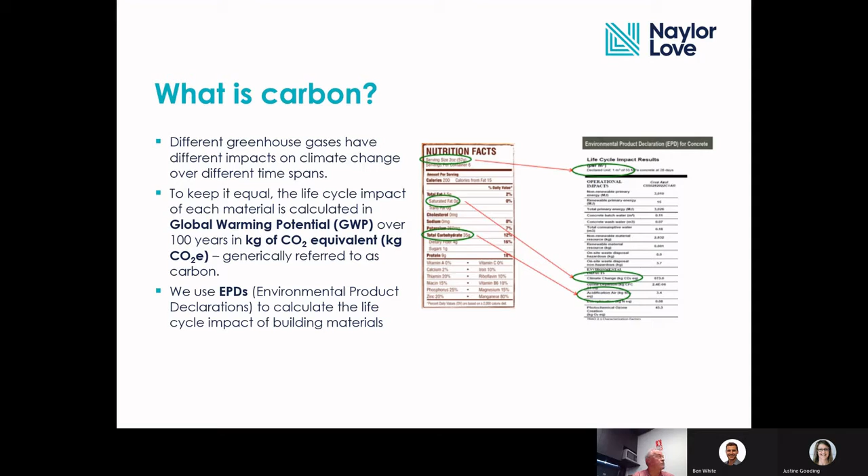The whole carbon cycle, pretty obvious. We know trees absorb CO2. Trees are a bit like humans. When they're young, they don't suck up much. As they get through puberty, they use a lot. And as they get towards the end of their life, like Grant and myself, they sort of slow down a bit. So ideally, what you want to be doing is using that timber and replanting to keep it going. So if we're going to cut down the Amazon forest to build timber buildings, it's not really going to work. But if we're going to plant another tree for the one that we cut down and utilize, it's a pretty good system.

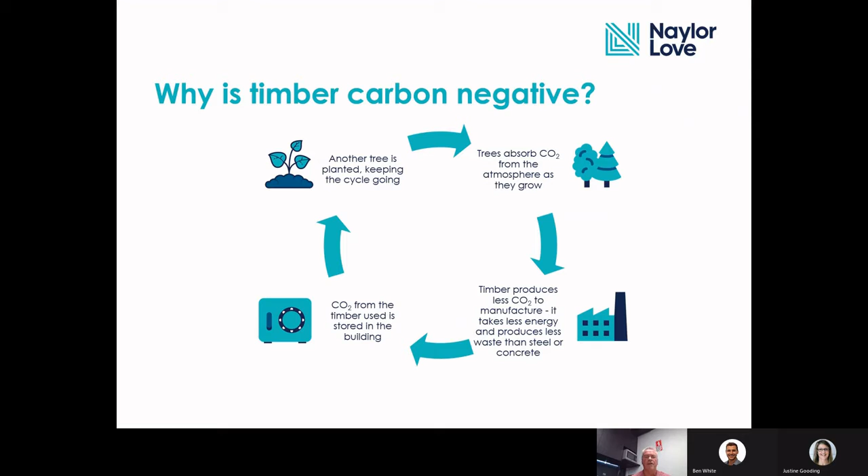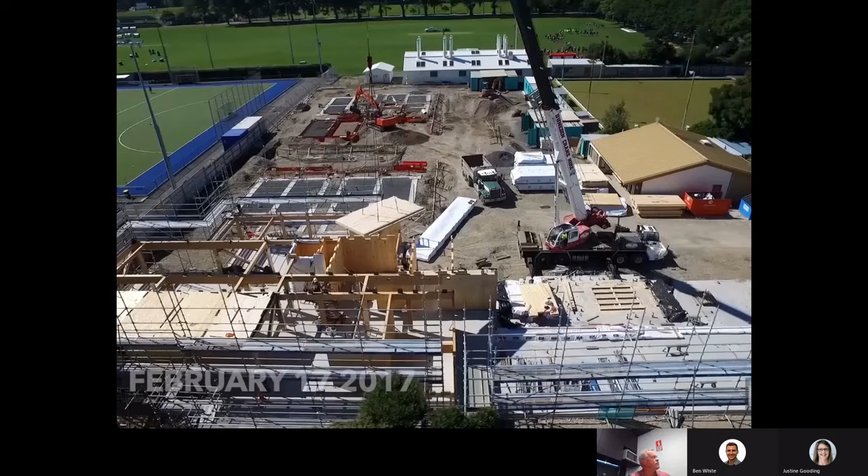Some unabashed advertising for Naylor Love. This is a building we built, you can see 2017, so a few years ago. This was CLT in those days, manufactured by XLAM in Nelson, and the LVL structural components in the lower floor from Nelson Pine. This may or may not work on Teams. We'll just see how we go.

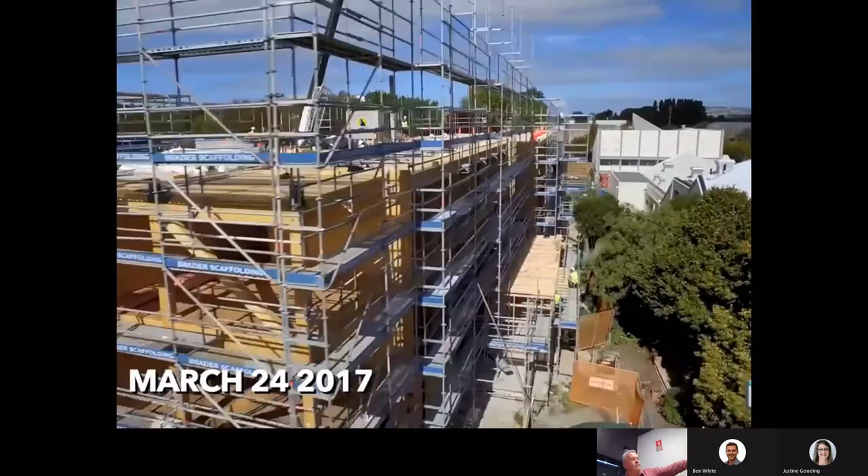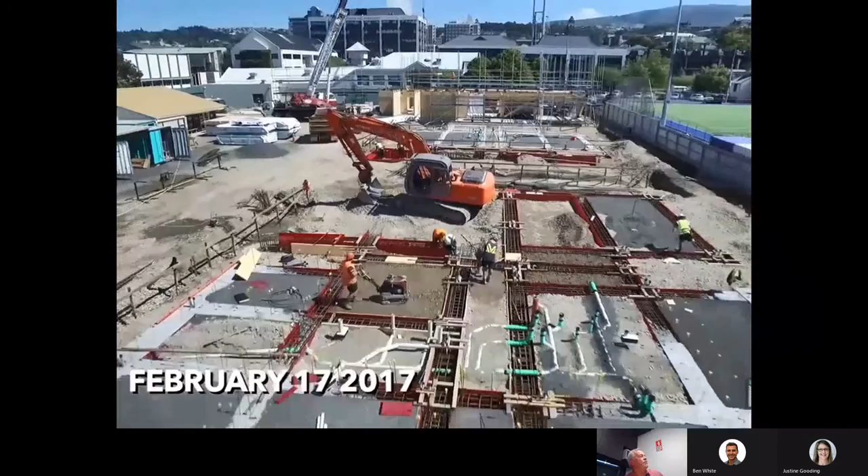So this is a student village at Otago Polytechnic. February 17th, we got components. March 24, which is 5 weeks later, we had a 5-story building standing. So the time to erect your timber components is really fast. You have to have everything complete and ready to go for that to make that impact. The time to sling an LVL column versus a steel column is arguably similar. And the fact is people like working with lighter materials, so it's perhaps a little bit quicker.

But the main difference is in the floor system. So in this particular building, CLT panels are going in as the floors. When that CLT panel is installed, you can work above and below it straight away. There was no propping, there were no other bracing elements. It was sort of 99% waterproof when it went in. So the speed of erection was really dictated by that floor system.

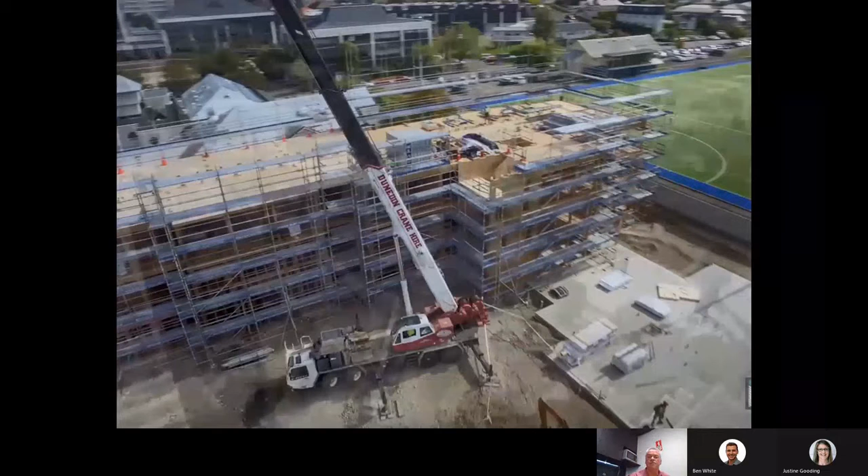On this particular building, the bulk of the CLT was untreated. If it's coming from Europe, we call it naturally resistant because it sounds better. I have a personal like for the larches and spruces and those sorts of materials. This was actually New Zealand pine, but it was still untreated because a lot of it was left exposed, and a lot of our clients don't particularly want that chemical treatment in all of their CLT or LVL.

The reason it was consented quite easily is you can see the perimeter of the building is missing. So pretty much all those elements are inside the building, apart from the wet areas. The wet areas in that building would be CLT treated to H3.2. The rest of it was untreated. The exterior of the building was a totally separate system, almost independent of the CLT structure, but obviously held by the structure, which allowed you to have flexibility with what you built inside and outside the building.

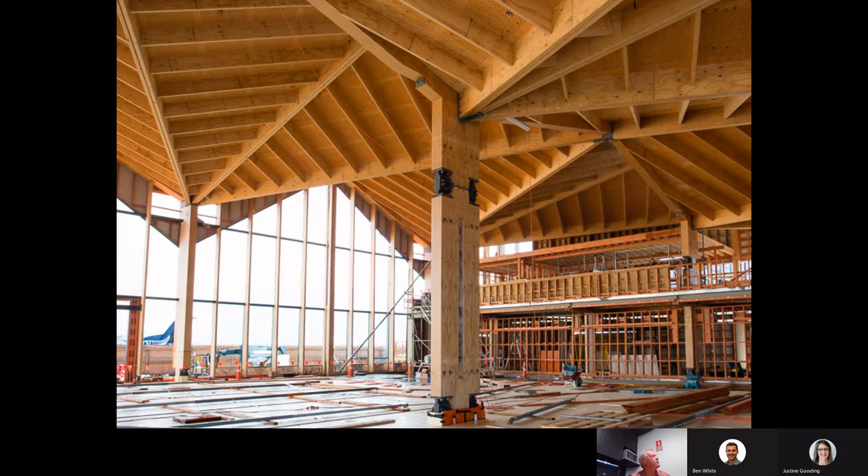Some other timber buildings: Nelson Airport, probably the most complex timber building we have done.

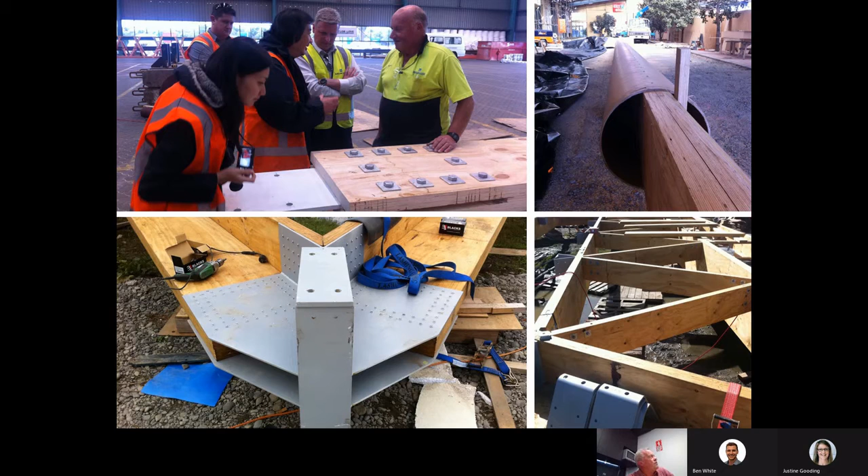A lot of the cost in these timber buildings is in the joints and detailing. So you can see the apex of that particular frame. Massive piece of steel, lots of fixings, all bespoke built. And one of the things we have to do, I suppose, as an industry is try to simplify these details. Not that you're going to build a lot of cathedrals. I think in that top right, you can see, each cardboard tube in that cathedral has actually got a great big LVL beam inside it.

As it turns out, it was one of the first hybrid structures that we'd built, although we didn't realize it at the time. So as we go through this presentation, we'll refer back to hybrid structures. So we basically have, if you think of the cardboard tubes as actually LVL, we have steel bracing elements taking seismic loads, and we have the gravity loads taken by timber, which is a recurring theme as we go through the buildings we've built.

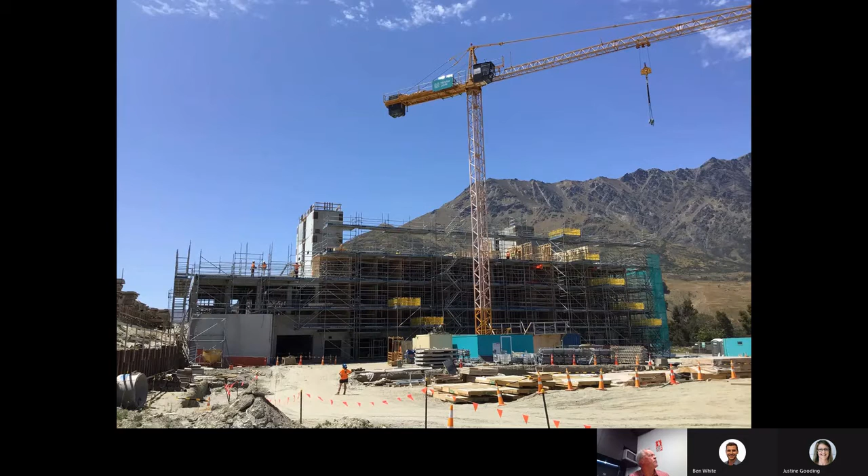This is another hybrid building we built in Queenstown. So it has a precast concrete, effectively a rocking shear core, and the rest of the building is built in timber. Now, this isn't a CLT building, it's stick framing. So the stick framing is supporting the concrete floor, a composite floor. I think every second frame has a timber joist, plywood deck, and then a concrete topping poured on top of it.

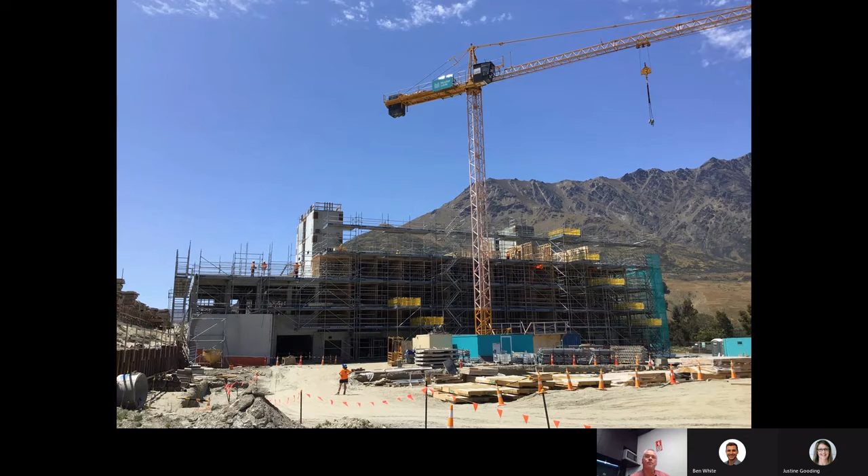So you wouldn't want to go around removing partitions later, but quite an interesting way to approach that build. Again, from the outside, this one chose not to express the timber. You wouldn't particularly know if it was a timber or a concrete build.

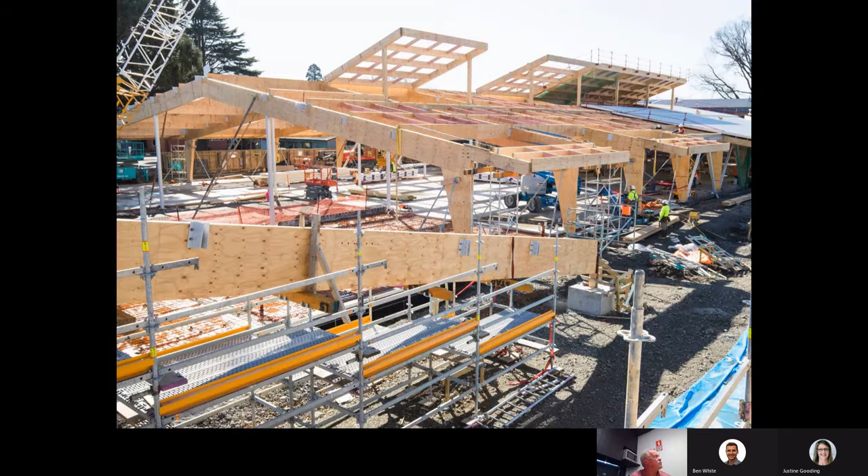Going quickly, I think it's Rangiora High School by the looks of it, and some industrial buildings as well. The industrial build wasn't to save the planet, it was because steel rusts, and both Ravensdown and Balance continue to build fertilizer sheds with steel purlins and steel cladding, and they all rust. This one has obviously LVL portals, I think glulam purlins, and plastic cladding.

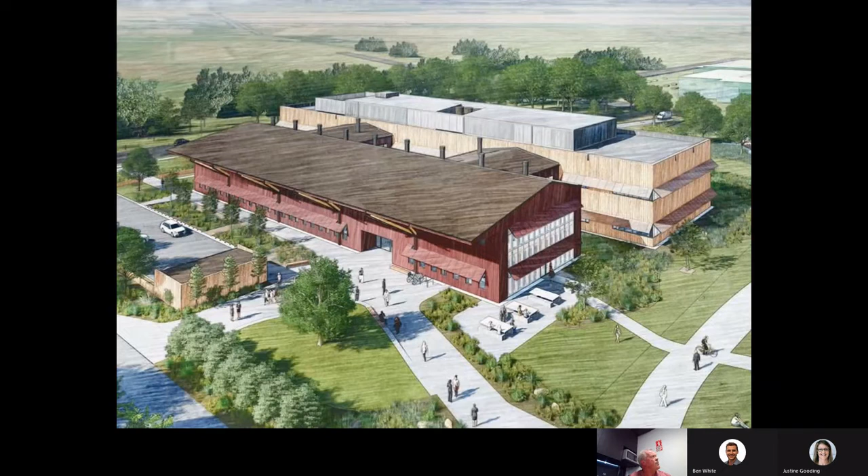Stuff coming up, just because it's sort of interesting in terms of the local area. AgResearch out at Lincoln, 2 buildings, one at the back's a concrete laboratory, one at the front is an admin building built in timber. Sort of demonstrates that timber is not great for everything. So the lab has to have minimal vibration and minimal deflection. It's going to be built in concrete. The office building a bit more flexible.

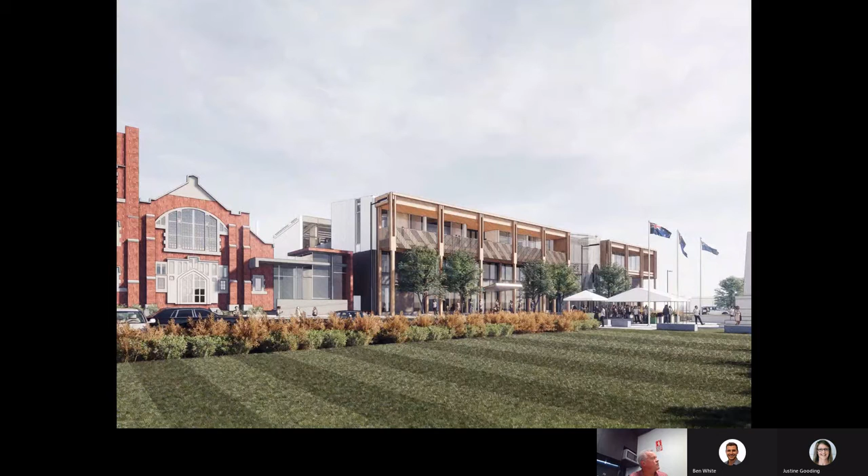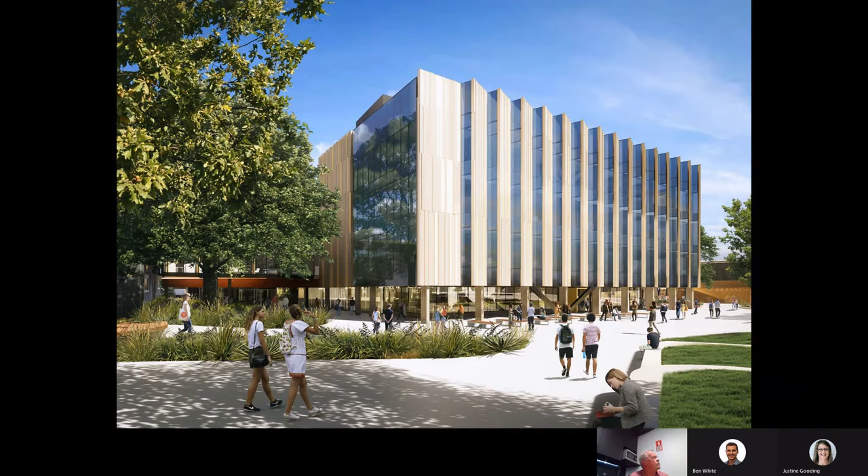Ashburton Library, just started that down south. That's predominantly CLT. In fact, it's all timber. There is no concrete or steel seismic resisting elements in that. Otago Polytechnic, again, all timber. It's started, it's a trade centre, and AUT A1 in Auckland is due to start later this year as well. So there's a bit more interest in these big timber buildings. Most of them are actually coming from government or pseudo-government departments.

What carbon savings can we achieve? So what we did is we designed a classic 6-level concrete and steel building in Christchurch. It was originally designed as a steel frame with steel K-braces and a Comflor type floor or a concrete composite floor. Okay, in this building, we assumed a level site. We kept the foundations the same, knowing that the timber structure will be slightly lighter, but for the sake of the exercise, we kept it the same. And we used the best possible EPD data everywhere.

So what we did is we kept the steel K-braces. You can see those in red. And the red straps going across the CLT floor are effectively drag bars to take the loads back into those K-braces. So it would be nice to do it in timber, and you clever people can do it all in timber. I suppose we thought from an economic point of view, it is going to be better to have $1 each way. Just explaining in terms of the elements that are concrete and steel.

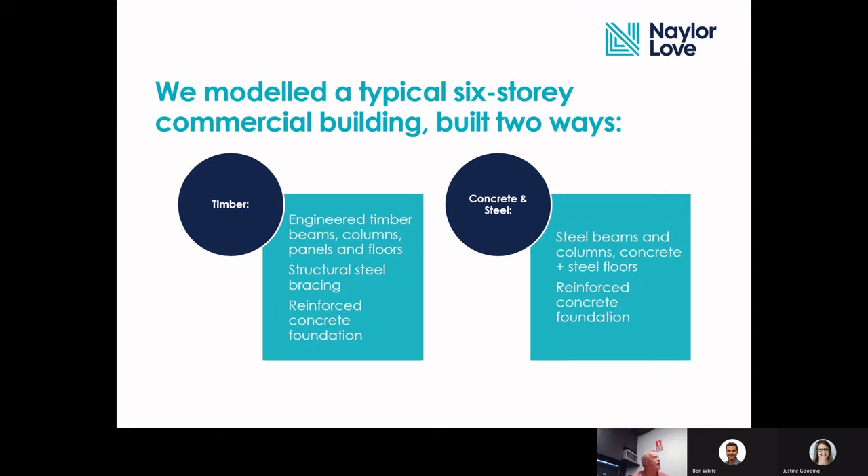We then decided to measure all these things. So we developed a carbon calculator type system with ThinkStep, which is basically a series of spreadsheets. And summarizing it down, what we're basically doing is taking your structural elements, measuring them in the appropriate form, whether it's cubic meters of concrete or kilograms of steel, depending on how the EPD data is presented.

So at this point, we had on the right-hand side our concrete and steel building, and then on the left, what we thought was a timber building. But you can see it's still got shitloads of concrete and steel. So we were a bit despondent, and we thought, well, the carbon saving is going to be minimal, probably wasted our time.

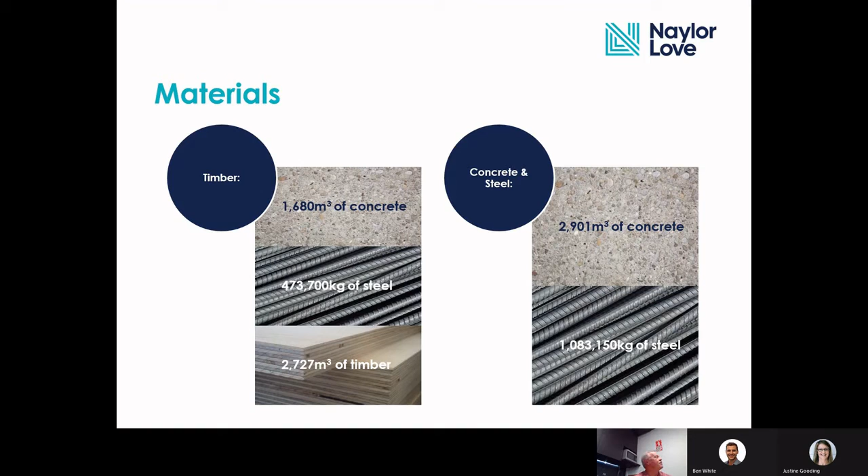In the event, the carbon saving was 90% on the structure. So quite staggering, the difference, given the amount of concrete and steel still in the equation. Now, how that basically works, as you all know, is we have this credit created by the timber structure below the line, and then we have the concrete and steel taking us back above the line. And effectively where those two points on the line stop is where we ended up.

So you can see from that building, it would be very easy to make the structure carbon neutral. You wouldn't have to do much to the design. In fact, if we realistically lightened the concrete foundation to what it should be, I'm pretty sure we'd get that building back to zero. So that sounds great, but to me, being a builder, it doesn't mean a hell of a lot. So we had to convert it into something I can understand.

So we saved 3,861 tonnes of CO2 equivalent, and that is the same as 2.5 million kilos of coal being burnt. So it's quite a staggering amount. Like, there is not a lot else you could do on this planet to save that sort of CO2 equivalent numbers. And it's great to drive your electric car and all those sorts of things, but it's a phenomenal amount.

As an example, Naylor Love Construction is a $650 million per year company. That's how much building we do every year. We have 8 branches, and our carbon footprint, actually you might have a slide. Effectively, it's equivalent to 2 times our carbon footprint from the entire year as that one building.

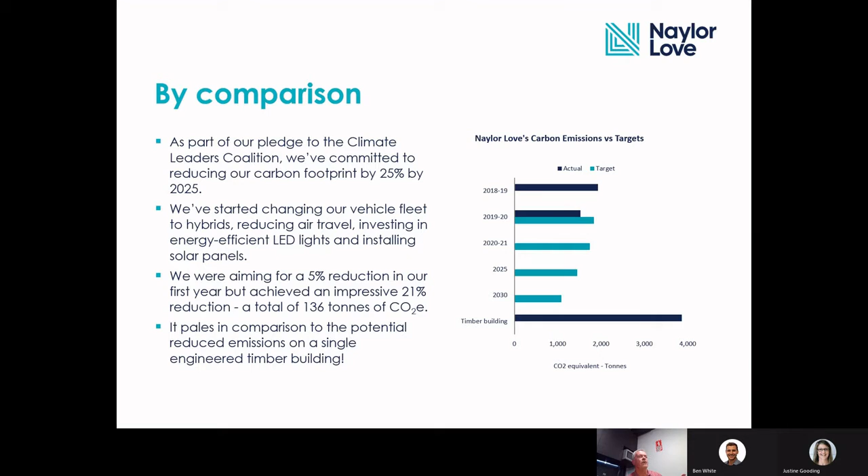In terms of cost, are there any QSs in the room? I'll speak slowly, it's okay.

In terms of cost, at this stage, we used European spruce for the exercise because, quite frankly, at that point in time, the New Zealand product was just too expensive. It's getting closer now with COVID and shipping and other industry pressures. But anyway, for this exercise we used European spruce, but as mentioned earlier, we measured the carbon to get it on a truck from the factory to the port, on a boat from the port to New Zealand. So the cost of that structure was about 10% dearer.

Now, all of that 10% was in the floor system. On a concrete floor, we have acoustic and fire given. In a timber floor, we have to use layers. So the additional cost on the structure wasn't in the structural elements. It was basically adding what we could call a computer floor or a floating floor on top of the CLT. I mean, you could bullshit and hide that in the fit out, for instance, but in reality, for it to perform the same as a concrete floor, we had to add this composite floor.

The good thing about it, it creates a great cavity for services, and it is relatively cheap. It can be a complicated computer cradle system, or like we've often done, I think we just did one at Redwood School, it can be a 3x2 on edge on a little rubber pad with stable flooring. So it doesn't have to be complicated, it can be relatively cheap. And that was giving us acoustic separation and an area to run services as well.

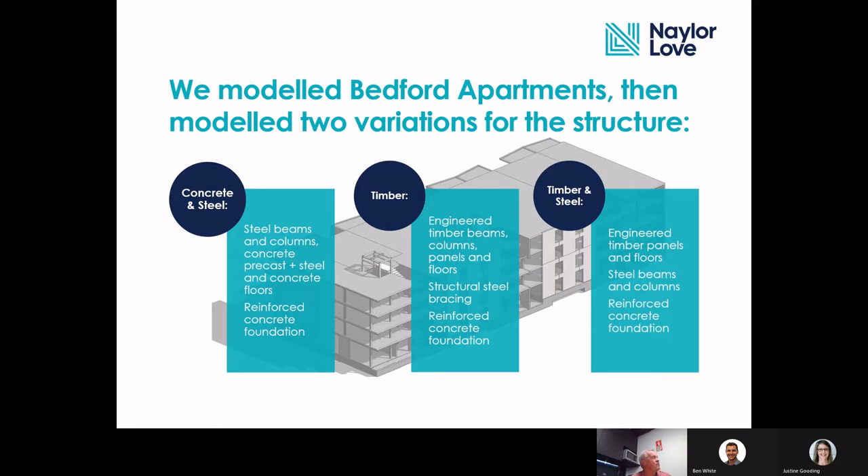So we designed it another 2 ways. We did it totally in timber: engineered timber beams, columns, panels, floors, structural steel bracing. And then the second one was more of a hybrid, so we had steel beams and columns included. We then started measuring all our materials, just a summary of how it goes, and we can see the 3 different versions there.

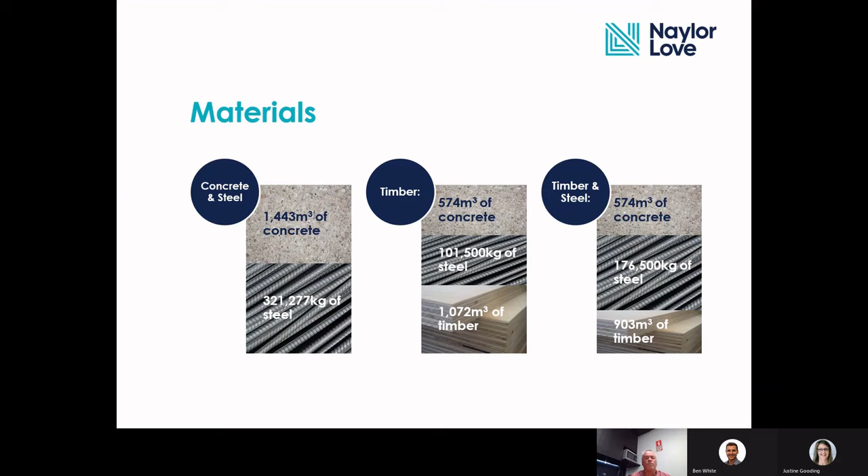Again, still quite a lot of concrete and steel, predominantly from the foundation requirement. We then measured the carbon, and there's the difference. So even in the hybrid structure, you're still looking at sort of a 90% saving in the carbon in your structure.

And I won't show any other examples, but basically between the two on the right-hand side, we have a nominal saving in carbon but a massive increase in cost. Okay, so if you want to take all your seismic loads in a relatively tall building through your timber structure, you can certainly do it. And we've got some examples of ones we're doing at the moment, and it's great fun and it's really good to build that way. But our experience is that that's a significant cost premium.

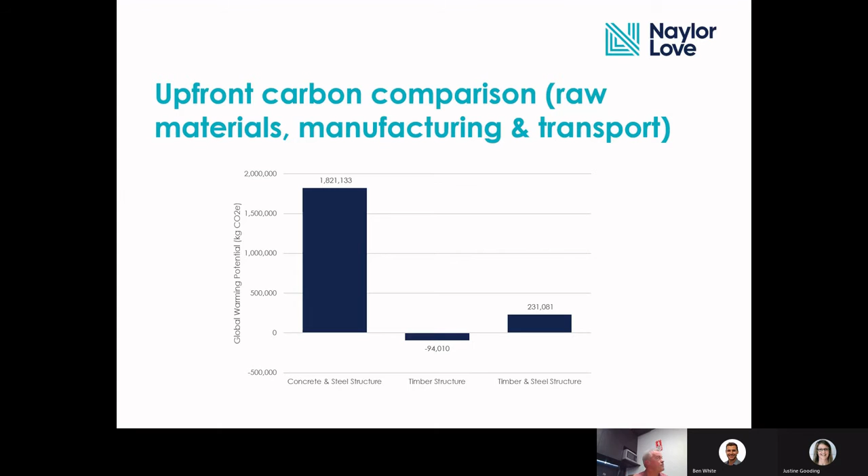So we're doing some buildings at the moment with sort of 300 thick CLT walls with Macalloy bars and dampeners, and they're cool to build, but they're very expensive. In summary, with that exercise, a building like that office building is about a third of the total cost of the build. Okay, so ultimately it's going to be a 3% premium if you design it appropriately.

That's what we believe. If you listen to some of the timber suppliers, the Red Stags and that, they'll say, look, we can build it for the same price or cheaper. I don't think you can. I actually think from our experience pricing these projects and building some of them, it's going to be a premium, but it's going to be quite small. If you can design it appropriately and you can save that amount of carbon for maybe a 2 to 3% premium, it's still very saleable. You know, I don't think it's ever going to be super cheap, but it doesn't have to be expensive.

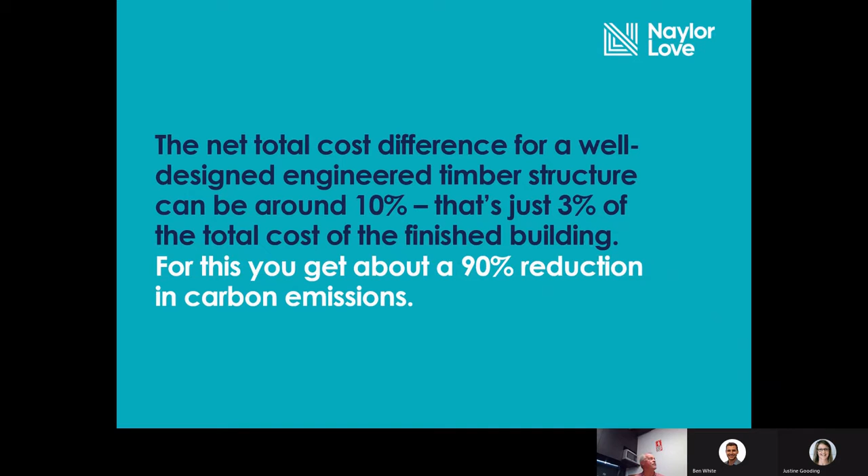If you're designing a big span open office building, don't do it in timber. It isn't fit for every purpose. You know, the elements are bigger, it sags more. But if you can control that and you're happy about using hybrid structures, it's certainly got great opportunity. In terms of lessons that we've learnt on the way through, hybrid buildings deliver impressive carbon savings at a comparable cost. So that was a big one.

So no matter how we measured it, and this gets right back to, at the moment, we're working on a design for a simple warehouse, you know, the red shed. So big portal frames, and we're doing one in timber. So we have LVL portals and we have LVL purlins, I think. And the engineer designed these great big timber columns in the middle to hold it up. And it was expensive, and from a retail point of view, quite ugly.

So take your big timber column in the middle and change it to 125 RHS and paint it white, and it disappears. And it's really cheap and it's really light, and it changes your carbon values bugger all, but it makes the commercial reality of the building work. So if we'd stuck to it's all got to be 100% timber, the client wouldn't build it. It was just too expensive. So if we want to get more timber involved in the industry, we have to, I think, this is a personal view, we have to be more flexible with some of those details.

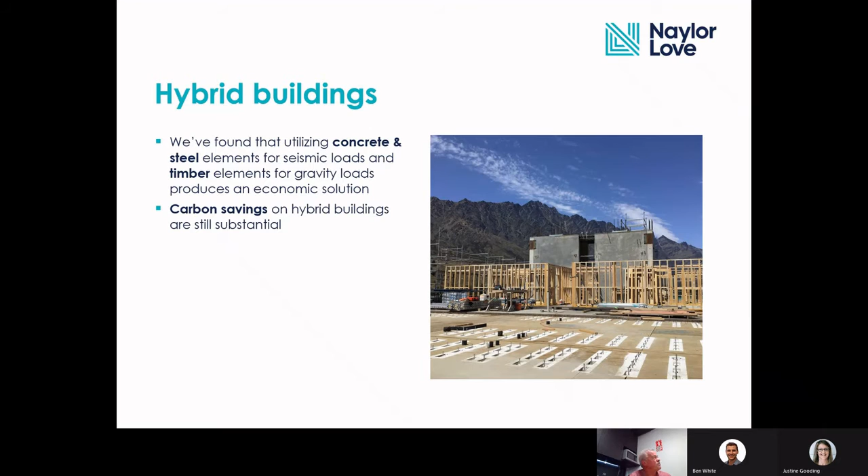Utilising concrete and steel, so that's another hybrid structure we did there. We've sort of pretty much covered that on the yarn on the way through. Cost comparison, so we actually measured one. So we're doing a timber job at the moment, and it's got, you know, the big shear walls in timber and dampeners and all sorts of things. And the cost of that shear wall is $1,400 a square metre. If we designed it in situ concrete, it would be half of that. And that's taking into account that we're going to have to make it a bit heavier because we haven't got that ductility. We're going to more elastic design.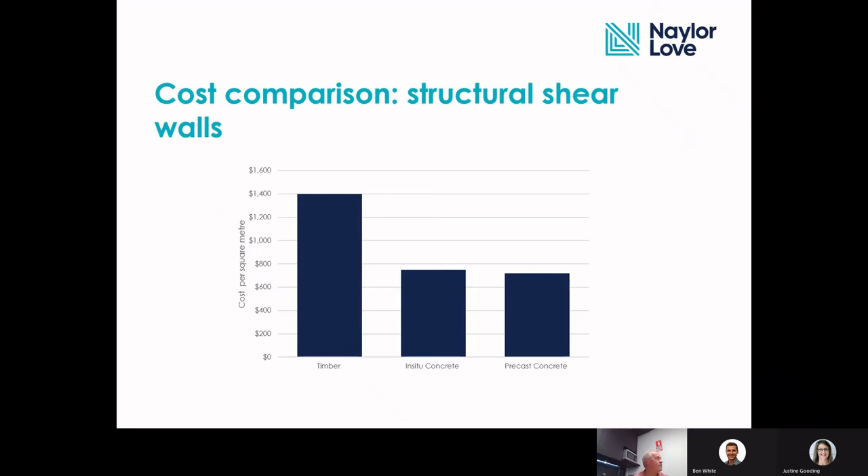But if we design it in precast concrete, it would be similar as well. So that's the magnitude of difference in the seismic elements. It's sort of double on the exercise we've done. So certainly don't want to discourage you from coming up with really cool seismic timber designs. But if cost is a factor for your client, you need to consider other more sort of regular designs.

The other thing we come across is also designing for the material. So standard New Zealand LVL comes 1,200 millimetres wide and 12 metres long. It can be spliced to longer lengths, but it can be expensive and a little bit ugly.

If you're trying to think about a simple example, say you have an LVL portal frame and you cut it into this really cool triangle, you're going to throw away the other piece of LVL, but you're also going to pay for it before you throw it away. Again, we come across this: we'll price the job for an architect and they say, oh, but the LVL supplier told us it was $2,000 a cubic meter and it's working out at $3,000. And we have to point out, well, you realize it comes like this and you've just cut a whole lot out, and that's gone to the chipper and is now used for fuel by Nelson Pine or Carter Holt Harvey. So it's important when designing it that you recognize the limitations of the material.

So LVL, 1,200 wide, 12 meters long. If you want it any longer, it gets expensive. It comes off the production line, goes somewhere else, gets detailed and spliced and comes back. If you have a funny shape, say an 800 rafter, you've got a 400 column there you can use. If you cut funny shapes into it, just be prepared to pay for it. Glulam can be made to any shape, form and length, but is generally more expensive.

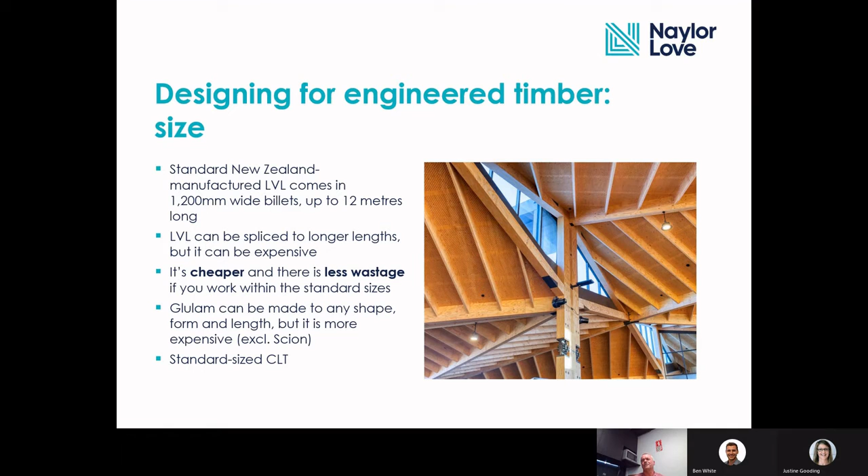So really roughly, you'll know more, but I was talking to Alistair Cattanach from Dunning Thornton, who we do a bit of work with, the other day, and he said he wants a 200 thick panel, and others will say we need 145, and I'm thinking 145 plus a bit of charring, maybe 165 in that sort of order. But you're spanning that 4 meters approximately. Let me know.

Some examples. At the Tauranga Airport that we built, the architect chose to make the portals look like that, which is quite stunning, but we did them in glulam because they're a funny shape.

Redwood School, you could say it's butt ugly, but it's a standard shape, and it's regular, and we did them in LVL, albeit we did splice them to get them to go the length. But they're two really simple examples in terms of horses for courses. That's perfect for its use. You'd be wasting your money doing that in glulam, but you'd be killing yourself trying to do that in LVL. So just remember the materials that you're specifying, working in.

Really, really roughly, a standard LVL structure, you'll get the base material for about $2,000 a cubic meter. For a glulam structure, it's going to be closer to 3,000. But it's very easy to get them mismatched and carried away in terms of sizes and quantities and wastage. What's CLT? CLT, I'll be careful of this one. Probably, look, to be fair, 1,800 a cubic meter. That needs to be about 13 or 14 to be comparable to concrete and steel.

Yeah. Pre-COVID, we could import spruce for about 30% less than we could buy it from Rotorua. I think that's probably changed a little bit now. It's probably getting a little bit balanced. And when production gets ramped up with CLT, it should come down. And when you guys tell me the size that you will specify, it'll come way down. You'll be building your houses out of it.

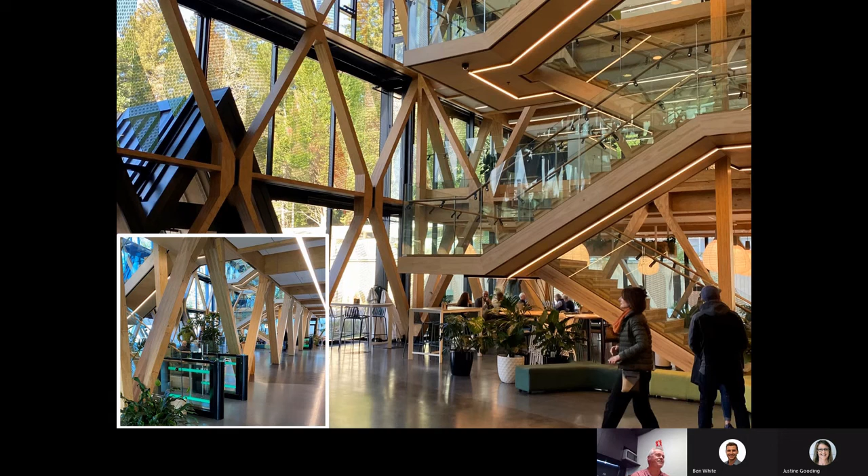So if it's a CLT floor and it gets wet, it's often as simple as squeegeeing all the water off every day. It's not rocket science, but if you leave it there, it'll get moldy. So it doesn't have to be complicated, we just need to consider it.

Treatment's another part of the material design. So LVL, really easy to treat to 1.2, so that's great internally. You can treat it to 3.2, but again, you're taking a material and you're adding quite a lot of expense to get it up to 3.2. My advice was, if you're in the 3.2 region, go to glulam. If you have a rafter that's going from inside a building to outside a building, and it's an LVL, you're probably going to have to protect it. If it's in glulam, you can leave it exposed. And these aren't necessarily engineering decisions, they might be architectural, but it's just being aware of those factors when you're selecting those materials.

The spruces and larches that all come from Europe, we like to call them naturally resistant as opposed to untreated, because the council hates that word, untreated. And look, the fact is the rest of the planet's been building out of those materials forever, so we shouldn't be scared of them. We just need to detail appropriately.

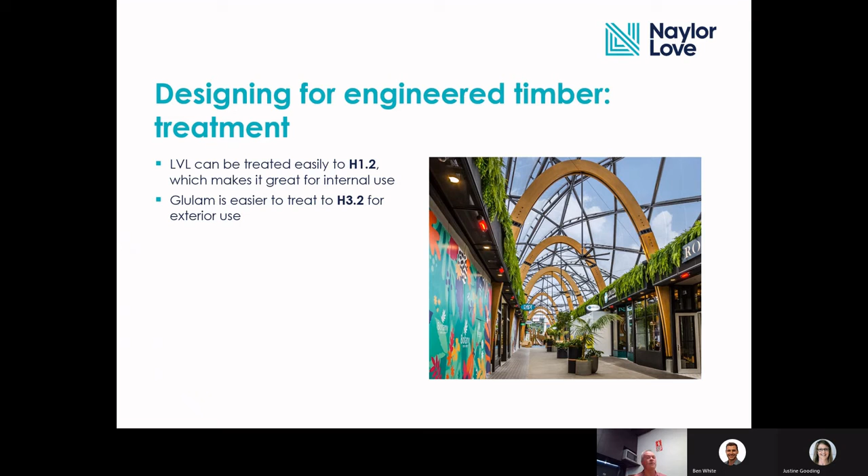Without sort of taking the piss totally out of concrete and steel, the concrete industry is doing its bit. Currently, we can use concrete with up to 30% of fly ash replacing the cement. So you're effectively taking 30% of your CO2 equivalents out of your concrete. I think next year there's some material coming off the east coast of Australia, and we might get it up to sort of 55. So that's good.

There's a note there about N-class reinforcing. It doesn't really apply to New Zealand because of our seismic code, but in other countries it doesn't have to be E-class. And we have now got one steel mill that's trialled producing structural steel from a hydrogen-based fuel. So you'll see there's lots of articles from concrete and steel saying, hey, steel's really good. And this isn't an anti-steel or concrete exercise, but the fact is that they all have to do their bit.

This won't go down terribly well with your clients. Press pause. So pretty much, if you're silly enough to tender a job and not negotiate it, well, then it's your own fault. But basically,

with timber, you have to complete your detailed design in conjunction with your supplier of your materials. You have to complete your shop drawings to 100%, and you have to have your production slot booked. If you don't have your production slot booked, your project won't be built. And when I say it won't be built, it doesn't matter how many men you put on site, you won't have your timber, and it won't arrive till the next production slot's available. And it's going to get more intense as timber goes up.

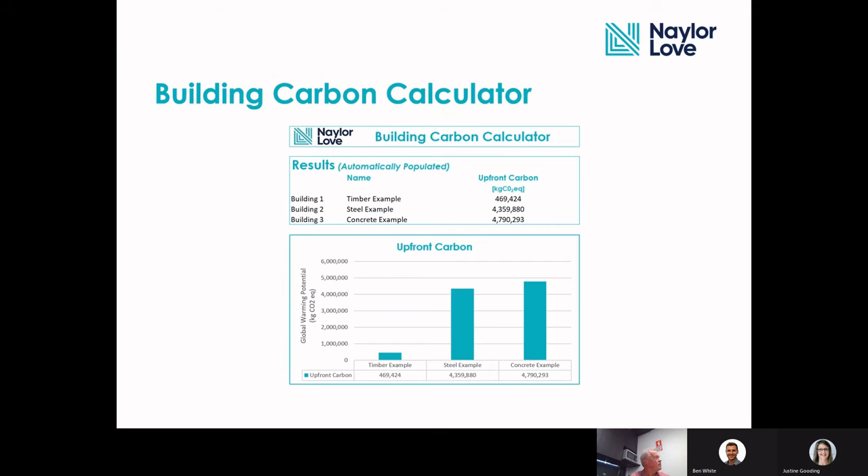With a bit of luck, I'll be able to open the carbon calculator and I'll show you. There's a couple of slides here. Any questions, which we can deal with in a minute? And we get asked this question all the time. Who would we recommend as timber engineers? And we say at the moment, there's only two. These blokes here. No, look, it is becoming more and more important through the whole client base.

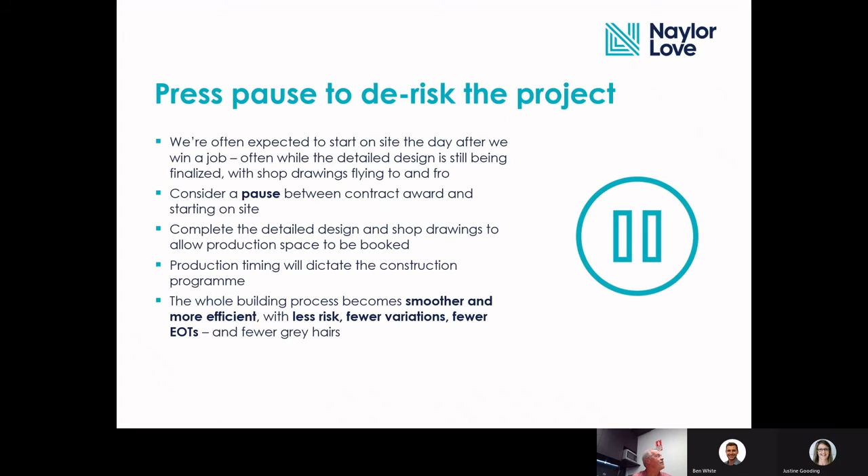Everyone's saying to us, how do we build it in timber? Who do we contact? So I think the Timber Design Society is a good sort of conduit to pass that information through. Everybody wants to learn about it. It is really easy to build an expensive building. And the worst thing we can do is to produce expensive designs, because it's going to hamper the progress of getting timber into it. So before I go into the calculator, is there anything else you would like to know or query or challenge? Come on, there's got to be something there.

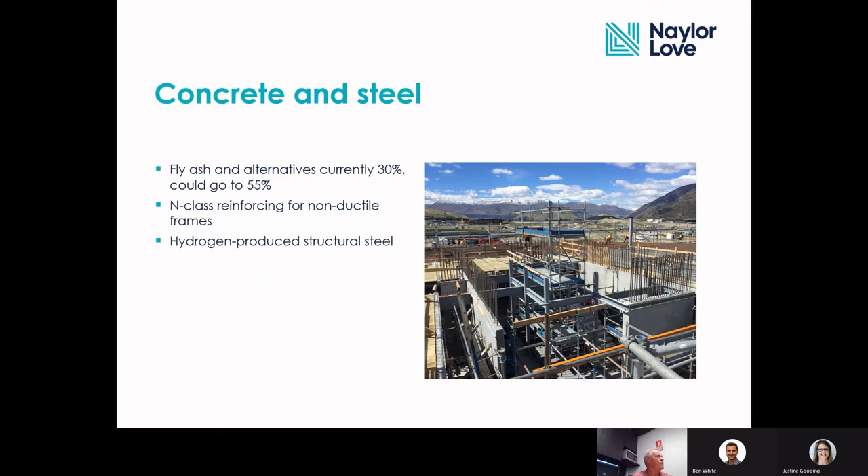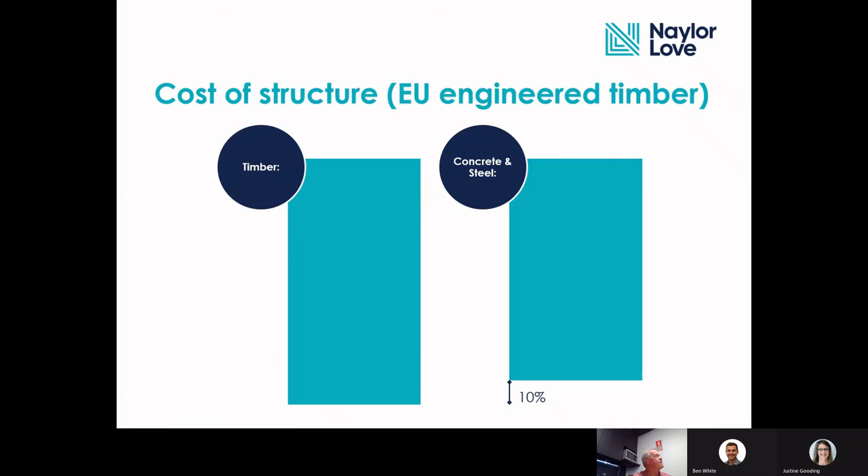I'm wondering, when you did the cost comparison, did you only consider material? Or did you consider also the savings on time in terms of preliminaries? The fact that eventually subcontractors will realize that it's easier to install piping and services into a timber building rather than a concrete building? Yep. Because that's something which I think many QSs absolutely forget. If they get the material cost right, they still forget the fact that you might be able to lease the building sooner. And the contractor has less time on site.

I think that is very correct, and I think we will get there with a little bit of time and experience. For this exercise, we did ignore the shorter program, simply because there were acoustic questions we hadn't quite answered. There were supply chain questions we didn't quite answer. So there were enough questions there to allow us to leave a bit of a contingency. So I'm pretty sure within a couple of years you'll be saying, yes, you can build a timber building for the same price or cheaper.

But I think at the moment, from the stuff that we've priced, none of us are smart enough yet to, for instance, we're doing a job now where the Macalloy bars are coming from England. They're $750,000 for the steel bars coming from England.

We wouldn't have expected that if we were doing an exercise like this. So yes, there's a bit of float in that 3% for that particular building, and I think you'll pick that up, but maybe not this year or next. I think that'll come with experience. Yeah.

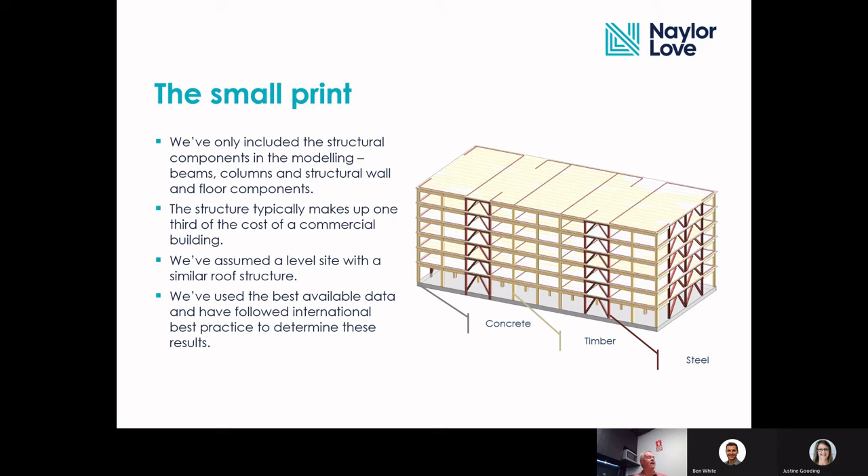Yep. There's a lot of these structures going up, three-story multi-unit housing buildings. Yes. Pretty much stick framing is the timber option there, but obviously you try and pull away from the... No, stick framing is good, but maybe CLT floor. Yeah. So CLT as an economic unit is quite good if you're using it on the wall and you're trying to leave some of it exposed. A lot of buildings are designed where it's all covered in Fyreline or acoustic gib or something. I think if you can, we'll go back and let me explain it.

So we'd have gypboard giving us an acoustic barrier, a fire rating, and a cavity to run services for both sides of the wall. The wall on the other side will be left exposed because students are going to kick the crap out of it, and you want to see the timber anyway because you're paying for it. Then the design will be flip-flop. So as you go down that floor, the rooms are flipped. So there's a common wall with one side lined with gypboard for acoustic, fire, services, and then the next one's exposed. Does that make sense?

Yeah. My question is more related to, does the extra bit of timber and stuff used in the stick frame come into your calculator as well? Well, you can measure it, yes. If you're doing it that way, the CLT would be comparatively priced. If you decided to line both sides of it, you may as well use stick framing.

What are the main things the wood processing industry needs to do to support what you're trying to do? The government needs to take control of the forestry again, because if this works, we're going to run out of timber. New Zealand, I remember the government used to own a whole lot of forests and they sold them all. And we're the only country that doesn't have a regulated forestry industry. So people, particularly from China, are currently in New Zealand buying all our timber, and they're buying timber that hasn't been planted yet.